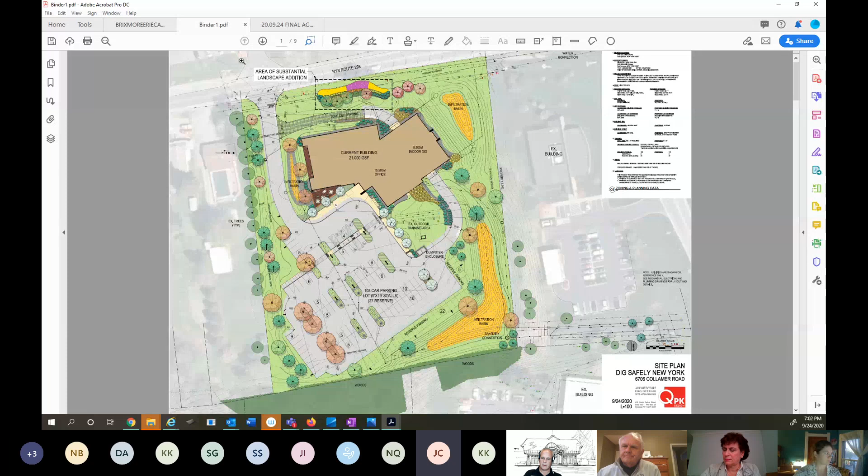Yeah, I mean, I don't know how much of a review we need. I guess we can get there if we have further discussion. We're trying to address the issue the town brought up relative to the tree that was intended to be saved, and then, after we reviewed several times, the tree was unable to be saved. We had an arborist work through this with the town. The direction provided was to see what we could come up with, some type of landscape feature. I think we've been through this a few times.

I know Joe sent some updates, given the circumstance of where we are on the timeline and schedule, to try to get this project wrapped up, so to speak, since we've been in our building for over a year and a half now. We'd really like to hopefully, we put a lot of effort into making a visually aesthetic roadside planting bed across the front, which Joe can certainly do to address those issues.

That's pretty much the feedback we got, that we wanted to have some type of complement along the road that would equally match the aesthetic of the building, which I think everybody could attest is a really beautiful building, and we're really happy with the outcome of it. But we're just trying to get a few of these things buttoned up, and this is essentially one of the last pieces to doing so.

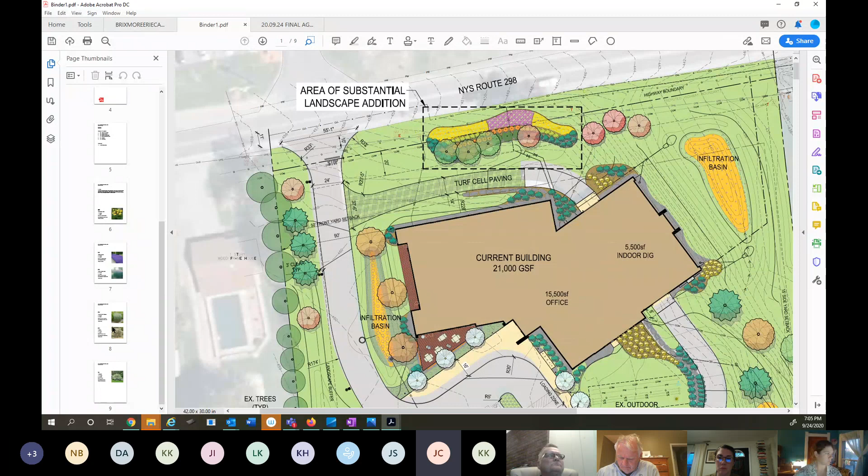The ninebarks and the nannyberry have a woody structure to them, which will provide visual interest in the winter and some grounding to the bed, so it's not a bed of simple herbaceous and perennial material just floating in the middle of nowhere.

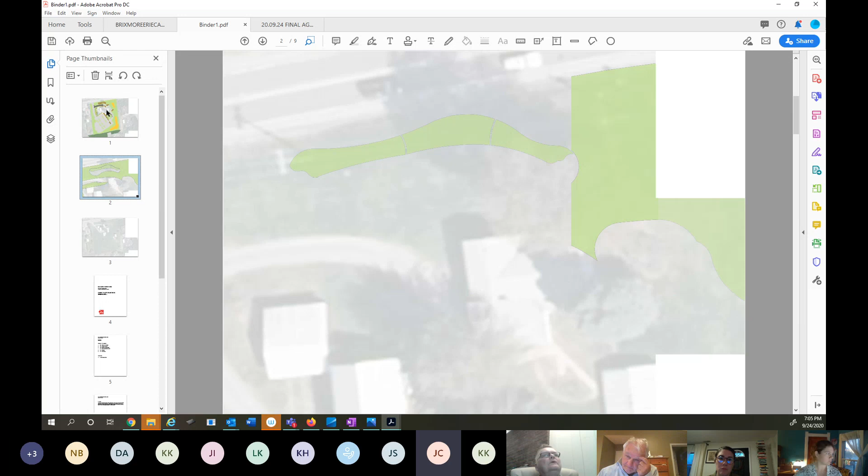In the foreground, which will be flowering all season long, are lilies and lavender. To supplement that, the ninebark and nannyberry will be flowering simultaneously throughout the early spring, and the nannyberry into the fall, along with the lavender and lilies.

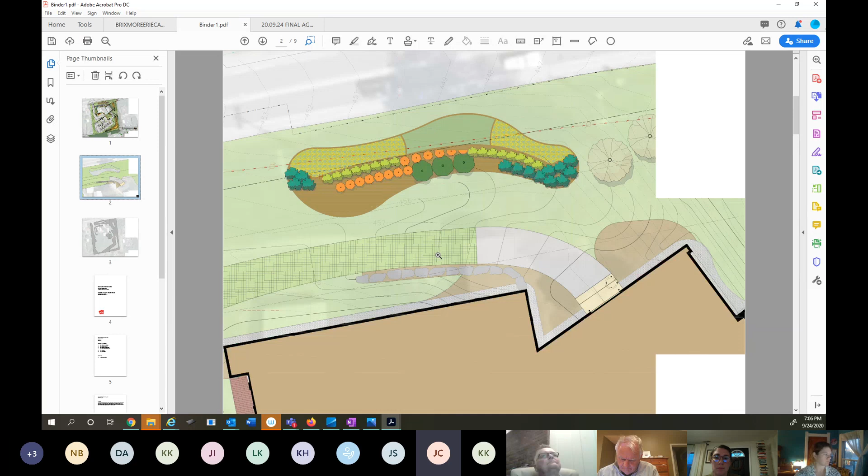So we feel it's a dynamic bed. It's substantial in that it flowers well and often throughout the growing season, and it's anchored in the winter and non-leafing season by substantial woody shrubs that will max out around 5 feet tall. Upon installation, they'll be our standard number 5 container plants for the ninebarks and nannyberries, number 3 to number 5 grasses, and 1 gallon lilies and lavenders.

Okay, thank you. So I have a quick question. I don't pretend to be an arborist by any means, but the plantings that are there, how deer resistant are they? I tend to think that lilies are just a feeding ground for deer.

No, not really, the lilies themselves are deer resistant. Perhaps you're thinking of hostas, which are a deer favorite. But the ninebarks are deer resistant, nannyberries are completely deer resistant, as well as the grasses.

Okay, I'm going to read a motion to approve the revised planting plan as presented, being an amendment and an addition to the existing site plan approval for the site, with the finding that the board accepts this revised planting plan as an acceptable solution to the gap left by the large tree that was removed during construction of the project.

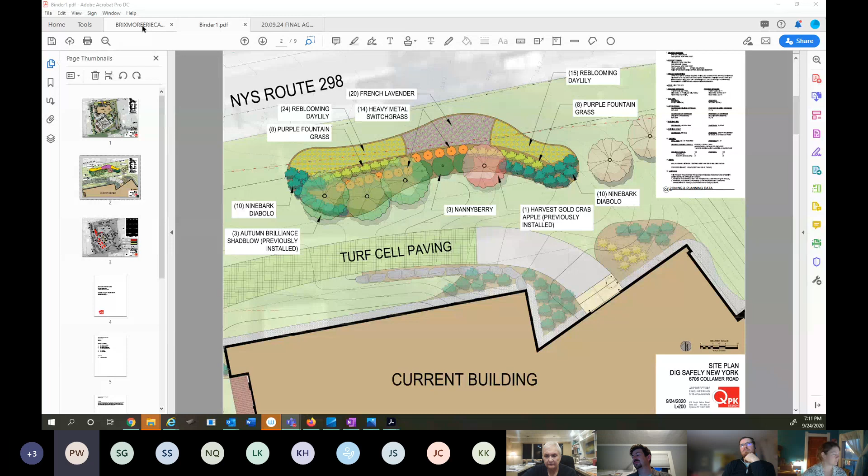Let's move on to the Brixmore charging stations. We have somebody here for that. Yes, Julia Ingram and Mercy Gideon are here from Kimley Horn, and we're here to review our plans to get approval from the board so we can go towards building permits and electrical permits. This is a project for proposed electric vehicle charging stations with our client, Electrify America.

Electrify America has electric vehicle charging stations around the country where you can go and charge your electric vehicle for around $1 a minute, depending on how large your battery is, which determines how long you'd need to charge your car.

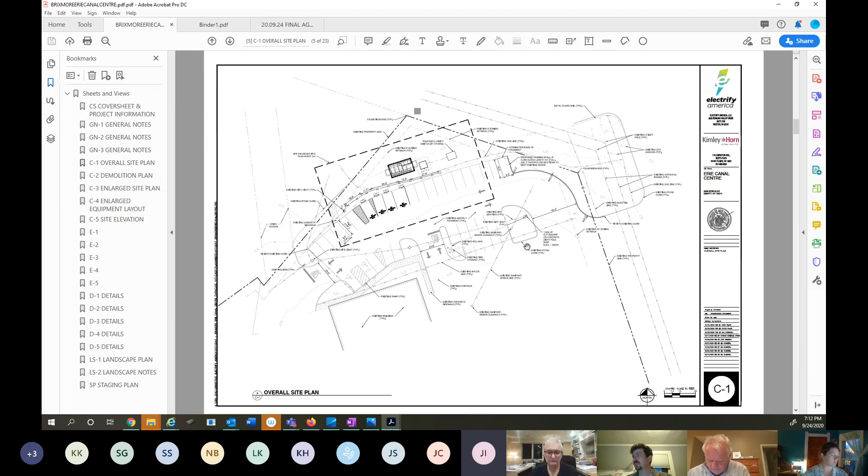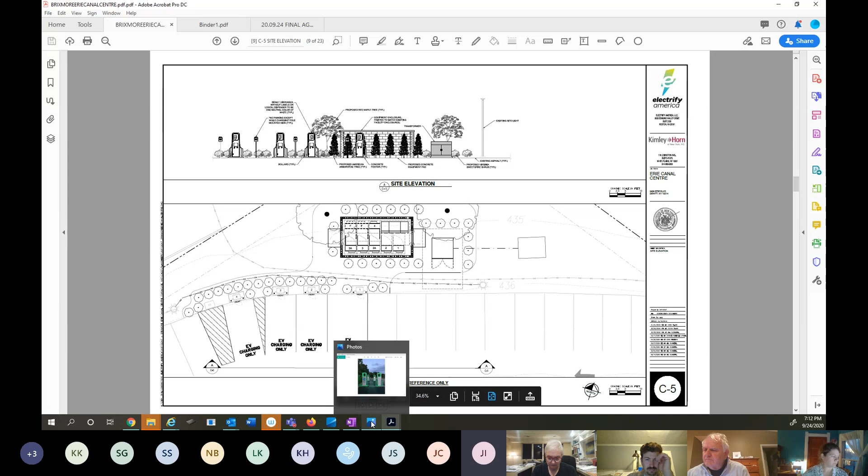We're proposing this location, and we also amended our plans to provide a smaller drive aisle width, as well as planting around the charging stations and around the equipment enclosure, which will match the existing Starbucks dumpster enclosure. At this time, we're hoping to discuss with you if you have any further amendments or changes, or if we can approve our plans.

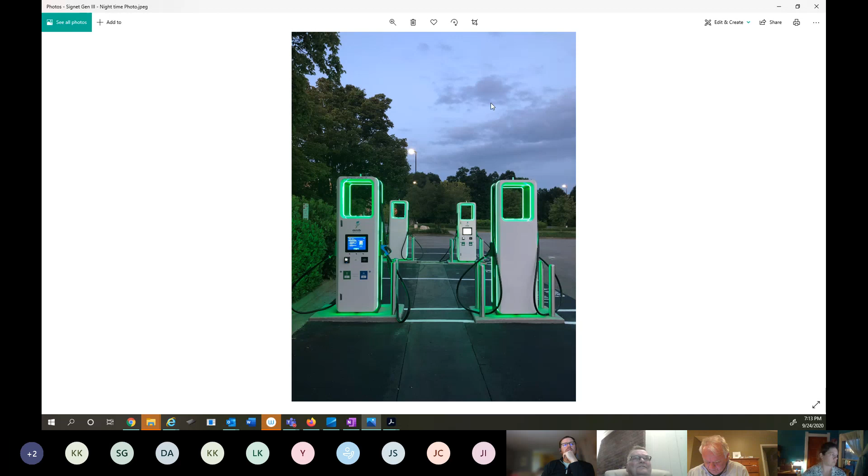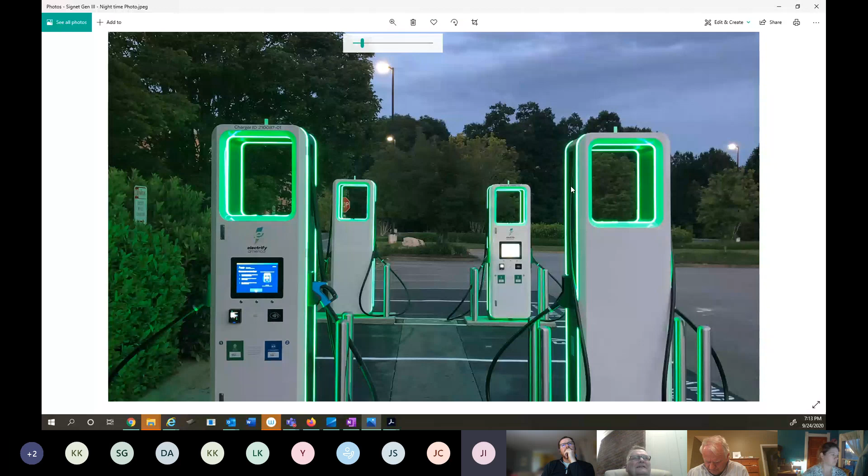So the bollards are not lit? No. The only thing that is lit is the perimeter of the hole? And around the edges as well. Around the edges as well? Yes, around the perimeter of the charger there's a light around that as well. I don't know, in my mind that's excessive. There is a way to turn that off as well.

I'd like to have the resolution have that perimeter lighting be permanently off. Okay, I don't know, I kind of like it. Well, it's called light pollution, you know? We're so careful about our light fixtures on buildings. I don't know how much light they give off, something like this. I mean, how much light do they give off? Standard, to me.

If we're looking to be a progressive community and highlight electric vehicles and electric charging stations, I mean this isn't like a giant flashing neon sign hung 10 feet in the air. I don't see light pollution to it. I think it kind of looks quite contemporary to me. But I don't think we'd want lighting on the traditional gas pumps throughout the town.

These are traditional gas pumps, though. I would tend to agree, not to have them lit this color. They're kind of freestanding in a field, there isn't really an edge boundary like there is in this photograph. Are they also going to get some light from the street, from the parking lot lights? They're white and they're tall and they're very conspicuous.

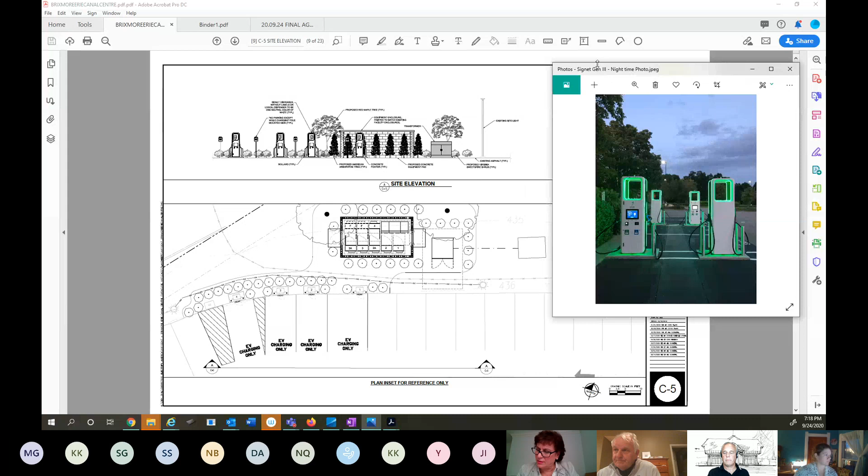So I'm going to read this motion, and Jamie, you'll just add what we just said back into it. Let me, if I can, add that part, which would be number 5: the lighting is to be on the stations only in the, what do you call it, the middle hole thing? I'll just say on the interior. Yeah, interior. I like the middle hole thing. Yeah, it's specific, that's a legal term, and not on the perimeter.

Okay, and if the manufacturer cannot do that, it comes back to the planning board. Okay, yep, got it. For a resolution, motion to approve the plan as presented and dated. What was the date on it? I didn't get the date, I'll get the date from Nick.

He's having feedback trouble as well. Okay. As presented, as an amendment to the existing site plan approval for this site, with the specific findings and conditions: 1, that the baseline parking count for the property as set forth in the prior site plan approval for the plaza remains intact. This project keeps the number of parking spaces on the site and for the plaza intact, inasmuch as the parking spaces now delineated for the electric vehicle stations are replacements for some existing parking spaces.

2, with respect to this plaza, the parking spots at the charging stations and the charging stations are not, in this instance, found to be a separate use, but rather the use is complementary to the plaza. It is expected that the parking and charging stations will be utilized by customers otherwise patronizing the plaza retailers. 3, no signage is permitted on the charging stations or adjacent thereto.